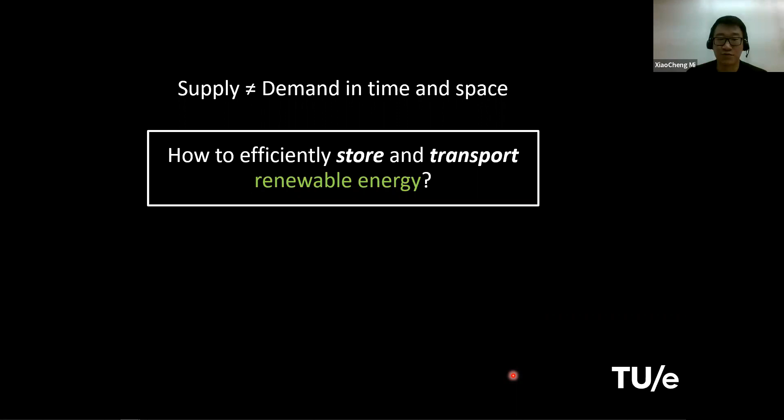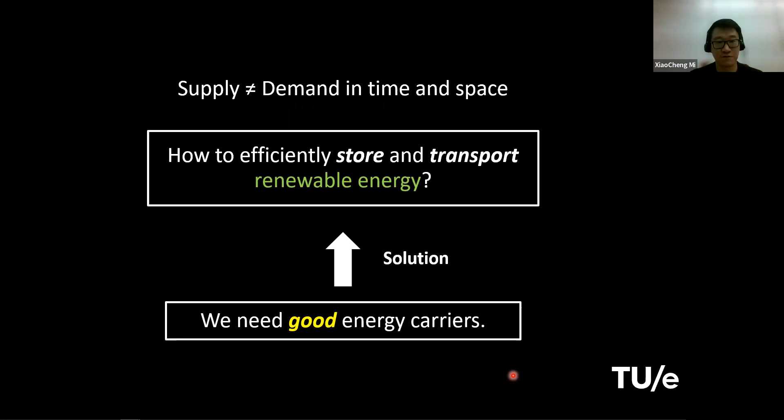So to solve our nowadays energy crisis, the real question is how to efficiently store and transport renewable energy. And what we are looking for now is the solution of good energy carriers or energy storage. In our conventional terminology in combustion, we call these things fuels. So what are the options?

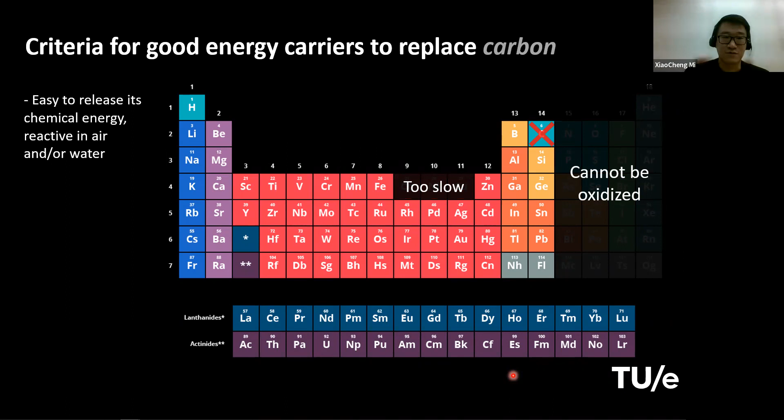Let's look at the periodic table. We know that we do not want carbon. We want to replace carbon, replace fossil fuels to reduce the CO2 emission. So let's cross carbon out in the table. And also we do not want those things that cannot be easily oxidized—either they are oxidizers themselves or they just react too slowly in air or with water.

Also, we do not want these heavy elements, because they are heavy their energy density will be quite low. We do not want rare metals or rare elements because they are very expensive. Also, we do not want anything toxic. Another thing I would like to cross out is these metals which are too reactive, like you can very hardly control their reaction—sodium, potassium, and so on.

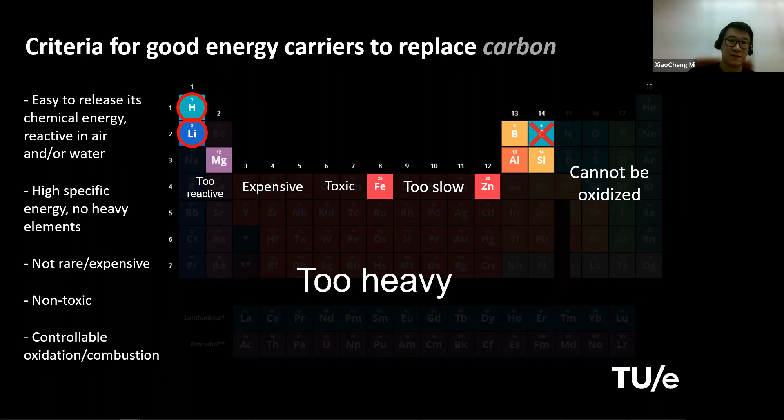Then if we look at this table again, there are not many other options left. Nowadays, there's a lot of attention paid to these two elements, hydrogen and lithium. But there are some drawbacks with using these elements as energy carriers. One thing is the low energy density.

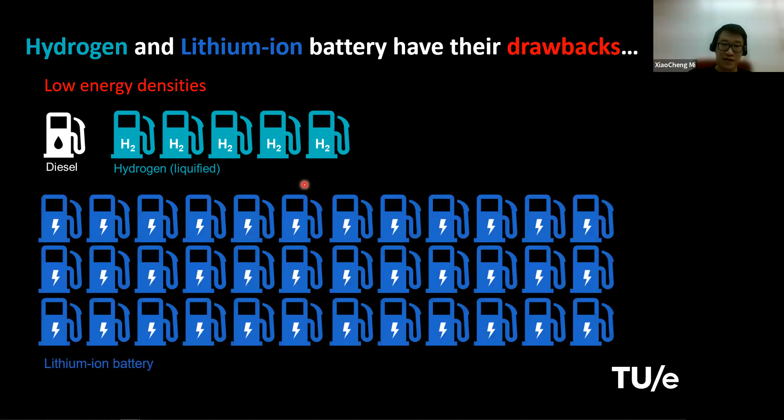So in this small cartoon, it shows that to contain the same amount of chemical energy, you need this one tank of diesel. But if you use compressed or liquefied hydrogen, you need 5 times more volume to contain that. And if you talk about lithium-ion battery, because it has to carry both anode, cathode, and electrolyte materials in there, and only the lithium-ion can transport energy, then the energy density is much lower. So you need that many tanks or volumes of lithium-ion battery to carry the same amount of energy.

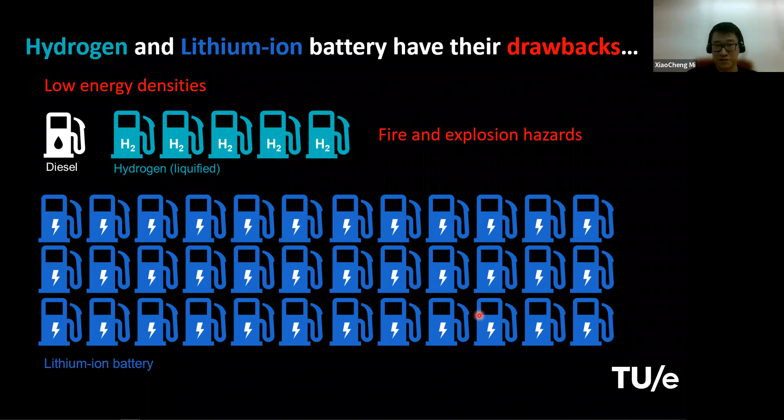And also, hydrogen has always this fire and explosion hazard. And also nowadays, people are talking about this thermal runaway and fire hazard with the lithium-ion battery as well. Another drawback with these batteries is it has a kind of slow discharge rate or loss of energy rate, about 3% per month. This is okay for your passenger car or your electronic devices, it's not that fast. But if you use this type of battery for seasonal storage of energy, this percentage accumulates and the loss becomes significant.

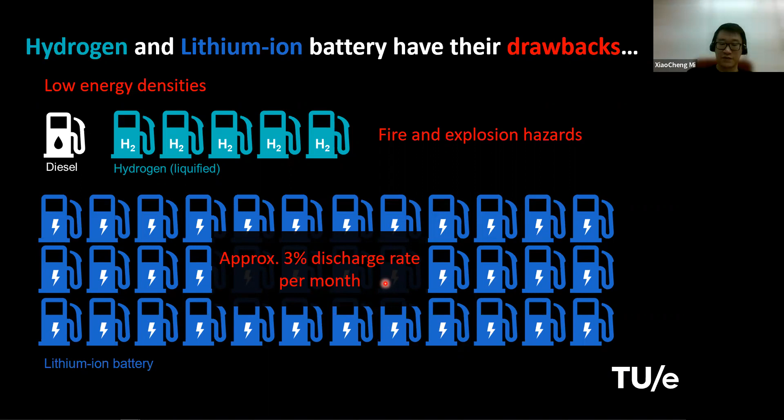So what we are talking about now is this metal-enabled cycle of renewable energy, or MECR. That idea is not mine—it was first proposed, I think, back in 2005 by a professor in the US whose last name is Beach, I forgot his first name, but that was the real first paper to propose this idea. Then in the mid 2010s, Jeff Bergthorson and some other colleagues at McGill reproposed this, and then my colleague Professor Philip de Goey imported this to the Netherlands, and now he's perhaps the most active researcher to upscale this idea to a global or industrial scale.

So the idea is quite simple: you burn some metal powders. Right now, the most promising candidate is iron. You burn iron dust, it releases heat, which can be used for power generation or just used as heat itself.

It has no CO2 or any other polluting emission, and these particles can be recycled after combustion. This recycled iron oxide can be transported to somewhere with easy access to renewable energy, which can be used either to produce hydrogen or directly reduce the iron oxide through electrochemical processes to regenerate iron powder. This powder can then be transported to where you need to consume the energy or generate power. So renewable energy can be transported over long distances and stored over long time.

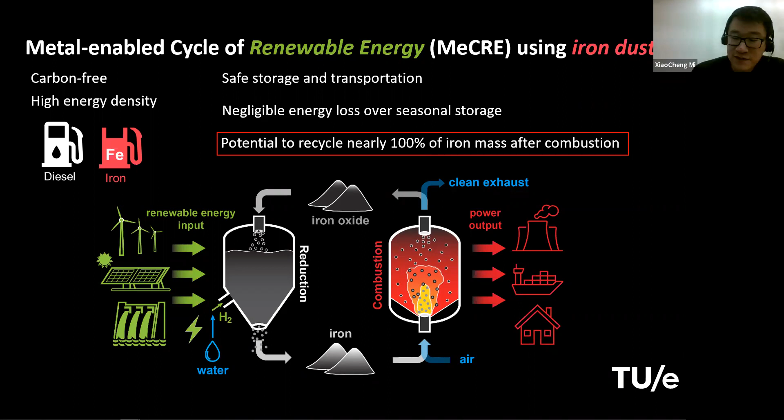I'd like to bring your attention to this feature of iron: it has the potential to be 100% recycled after combustion. This is because it has a very high boiling point, and during combustion the temperature of the droplet or particle won't exceed its boiling point, so it won't evaporate violently. Throughout the entire combustion it stays in condensed phase, first solid then liquid, but it never completely evaporates into gas phase.

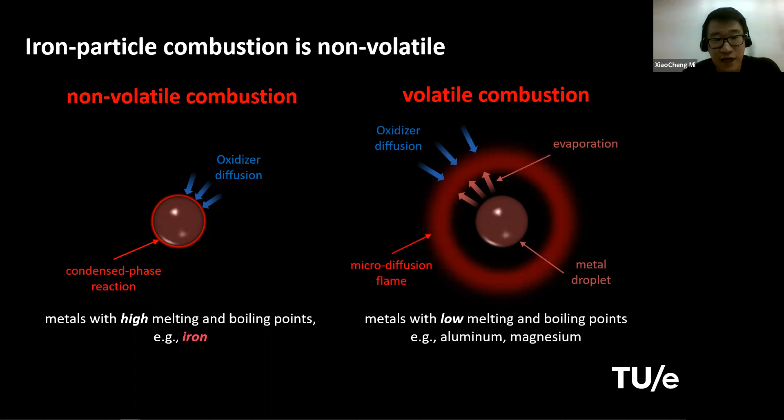This is quite different from other metals like aluminum and magnesium, which have a relatively low boiling point, so their combustion is volatile, where the fuel evaporates first and most of the energy release happens in the gas phase. Because of this unique feature of iron combustion, it gives rise to some very unique characteristics and problems we need to solve with iron dust combustion.

One thing is this heterogeneous oxidation process. Because the particle remains in solid and liquid phase throughout combustion, there's always an interaction between the gas phase oxidizer and the solid phase fuel. Also, because of this non-volatile combustion, the energy release is always first concentrated in the near vicinity of the particle, making the energy release over space highly discrete, as opposed to a more homogeneous or volatile fuel in gas phase where the energy release is more spatially uniform.

Let's look into these unique features, because the real physics or new problems we need to tackle—ones we cannot explain using existing combustion knowledge—are related to these unique features. Let's look at the first one: iron particles are stored in solid phase, so to start combustion the reaction must first happen in solid phase. Understanding the solid phase oxidation mechanism really allows us to understand the ignition process of iron particles.

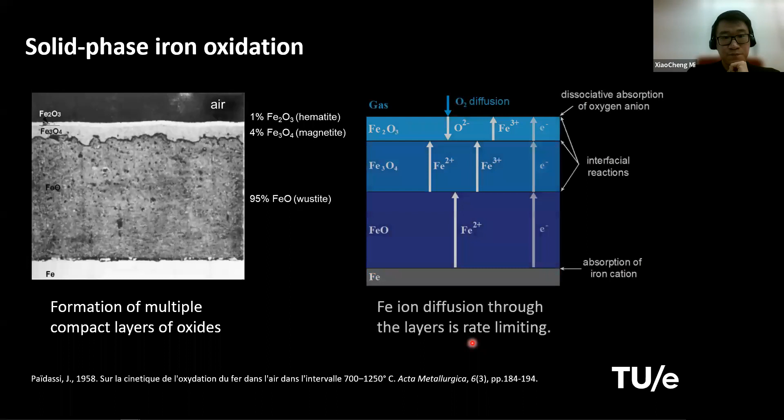People can measure the thickness of these different layers over time, and from there get some kinetics. The mechanism driving this oxidation is the following: in the first layer you have bidirectional diffusion between iron ions and oxygen ions. In the other layers, oxygen ions cannot easily squeeze through because they are big, and through this lattice their mobility is very low. So it mostly depends on the iron ion diffusing outward to meet up with the oxygen stored in the lattice to form these layers.

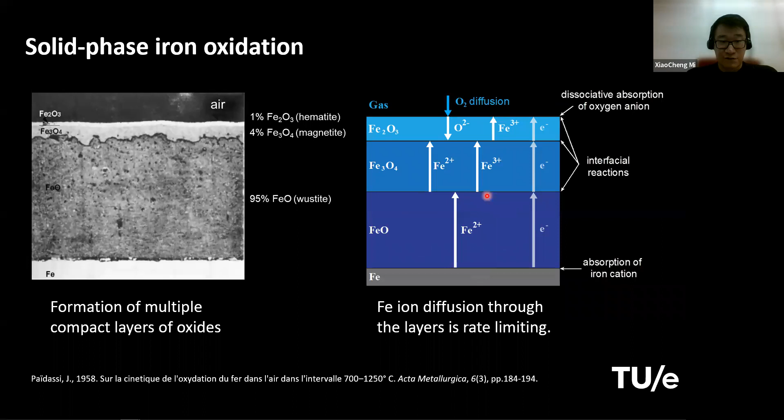So this overall oxidation process is mainly limited by the rate of Fe ion diffusion through these two thicker layers. The FeO layer is definitely thicker, so iron ion diffusion through this layer is the rate-limiting step. We can take this idea and wrap these layers around to build our single particle model for solid phase oxidation, and use this to study the ignition characteristics of iron particles.

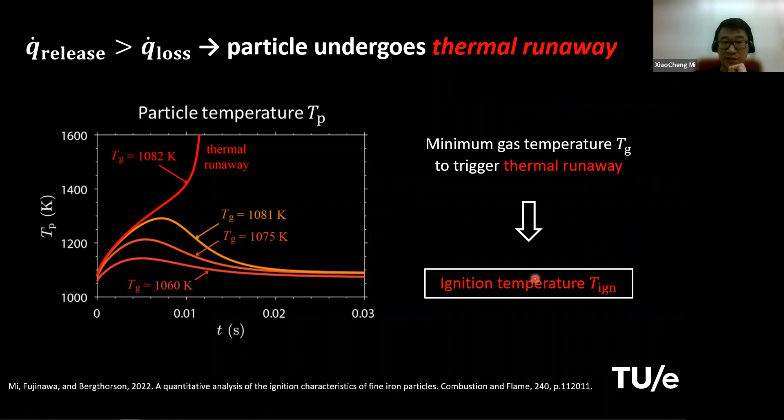Right now, the only experimental value we can compare with is not for iron particles, but for iron foils, or a small piece of iron held by some supporter. They determine ignition temperature using a similar definition as we use here, and the temperatures are not too far apart - I think less than 10% different. But since they're holding these samples with solid frames, they also experience conductive heat loss, which can increase the required ignition temperature.

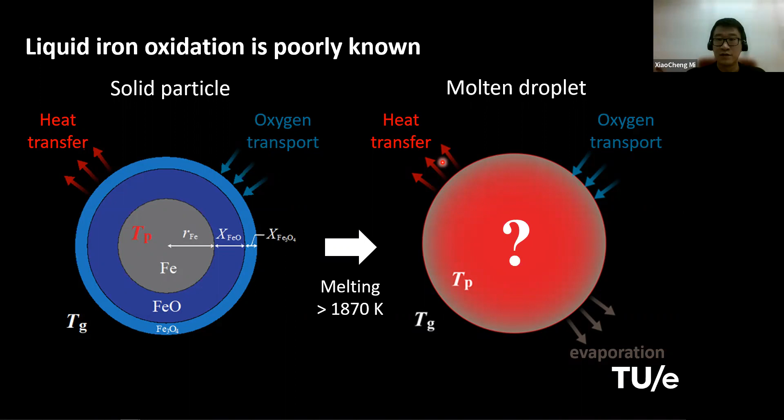But this is all based on the assumptions in this model. I'm not saying this is 100% correct, because there's no experimental measurement of particle ignition temperature yet - experimental verification is required. Once the particle ignites, its temperature can increase to the melting point, and eventually the full combustion process happens in the liquid phase, between the liquid particle and the gas.

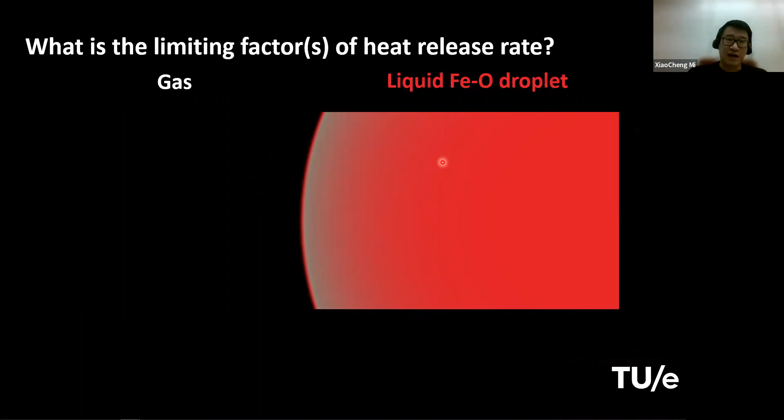What could be the possible limiting factors controlling liquid phase oxidation? One is still the external transport of oxygen molecules from the bulk gas to the particle surface. The other is surface chemisorption - how much of the oxygen molecules that reach the particle surface can be absorbed as ions into the particle. Also, the internal transport of Fe and O ions could be a rate limiting factor.

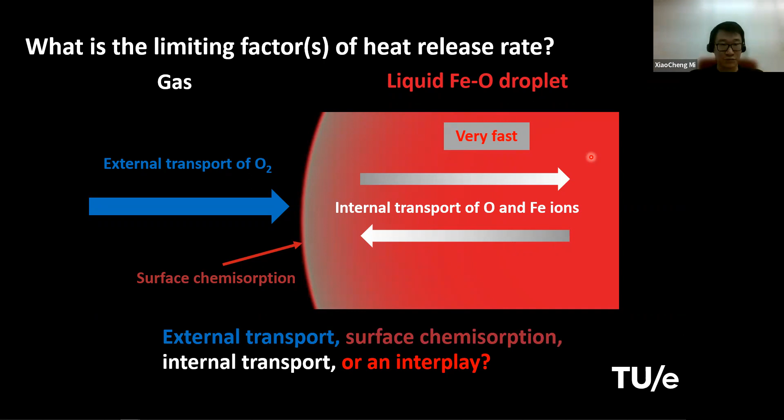Another factor, which is actually not very likely rate controlling, is the reaction rate between Fe and O ions. The reason is that at this very high temperature, once oxygen is dissociated into the particle as ions, it can react with iron atoms very quickly - there's almost no activation energy required for this reaction. So the reaction rate itself might not be the rate limiting factor because it's very rapid. The question is: which of these three - external transport, surface chemisorption, internal transport, or an interplay among them - is the real rate limiting mechanism?

Let's try to answer this through some study. We'll go through some research.

It's more like finding different pieces of the puzzle, and by the end of this part of the talk, I will show you how far we have gone at the moment and what are the remaining unknowns.

To start this journey, first we need some experimental anchor point. We need some time scales, some first-hand experimental input. Otherwise, we're just guessing different things and making different hypotheses without really having any physical touch on reality.

So the two sets of experimental data I'm going to talk about are both from single particle combustion experiments.

The first one is obtained by a former PhD student at TUE, Daoguan Ning, and his colleagues. He used this laser ignited particle reaction system. This is a top view of the burner, and the particle is emitted from this center point. It comes out of the page, and then it will be heated by a laser. The laser can ignite the particle, and then the particle's trajectory and its combustion process will be recorded by cameras, and the temperature can then be measured through this two-color pyrometry system.

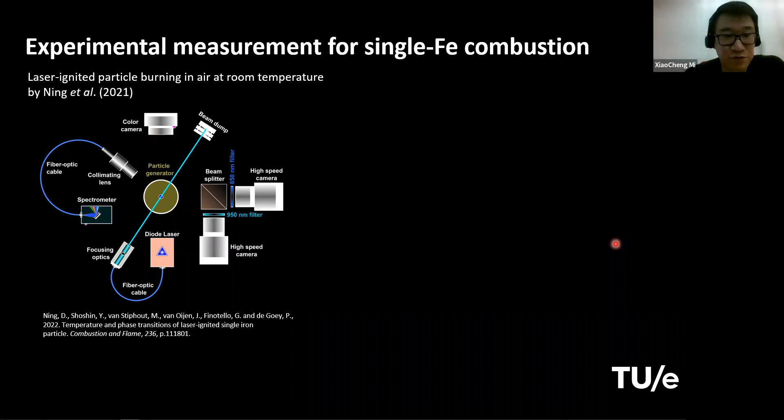The most important result we can use to compare with our model and hypothesis is the temperature history of a single particle burning in different conditions. This is the one that Daoguan Ning and his colleagues obtained. This curve is the temperature, for a particle size around 54 micron, in air. The surrounding gas temperature is just room temperature, so it's considered a cold surrounding. You can see the peak temperature can go up to around 2400, below 2500.

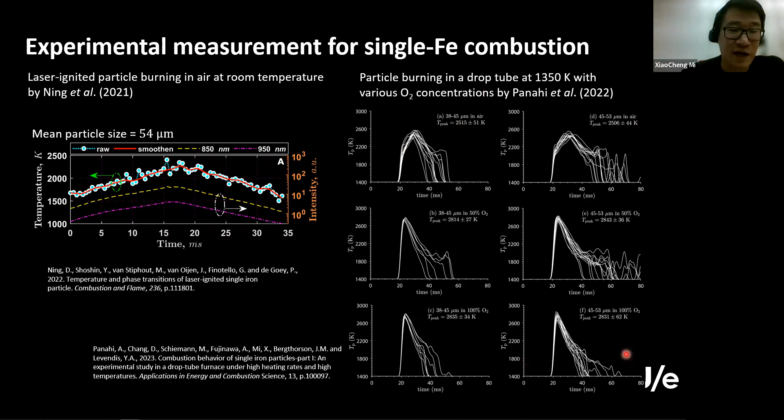These are results obtained from the drop tube experiments. The authors performed two sets of particle sizes, although not very far apart: one from 38 to 45 micron, and another from 45 to 53 micron. They did this in three different oxygen concentrations: the top one in air, the middle one in 50% oxygen, and the bottom ones in 100% oxygen.

We had not only TUE and McGill, but also other universities participating in what I call this early campaign of iron particle modeling. I'm going to review only a few that I'm more familiar with, to let you know what we learned from this early stage of modeling.

In this early stage modeling, we did not include all the possible physics, because we wanted to start with something simple and see if this simple model can capture the most essential physics. So we made the following assumptions: we assume the internal transport is very fast, infinitely fast, so we eliminate that as a rate limiting factor. And we assume that inside this liquid particle, FeO is the only product. Once all the iron is converted to FeO, meaning the molar ratio of oxygen inside the particle is 0.5, we just assume the reaction is over and the particle cools down inertly.

Also, on the particle surface, we assume 100% absorption of oxygen — as long as the oxygen molecule can reach the particle surface, it can be absorbed into the particle. And the heat and mass transfer in the boundary layer around the particle, we assume they are in the continuum regime. In the model, to calculate these transfer rates over the boundary layer, we use the continuum model.

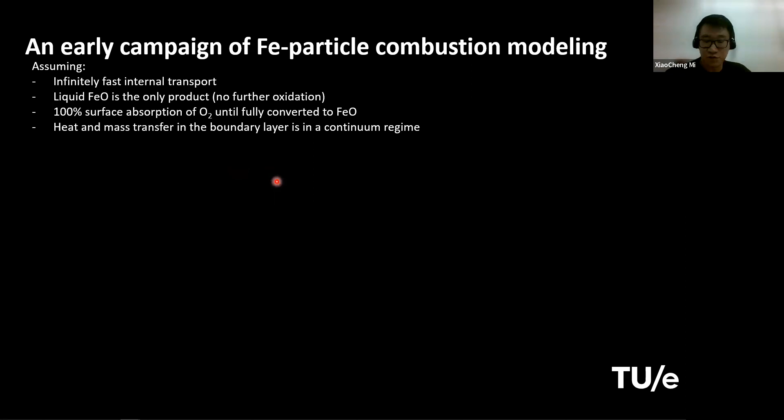So this is what we got — two independently developed models. On the left is work developed by my colleague Leon Thijs and his colleagues. He used a boundary layer resolved model, basically a 2D axisymmetric model where you resolve the gas boundary around the particle — not a single 0D particle model. He showed that his result, this solid line, matches with Daoguan Ning's experimental result, the laser ignited cold environment result, pretty well. Overall the trend is pretty close, and the peak temperatures also agree well with each other.

A student that I supervised back at McGill University, Aki Fujinawa, he also did this job using just a 0D model without all this detailed or more accurate resolution of the boundary layer dynamics. His results maybe it's not as good as Leon Thijs' result, but it's overall okay. The separation between the peak temperature of the experiments and his result is somewhere around 100 degrees. And the overall time scale reaching the peak point is also quite close.

This gives us some hints that FeO might not be the final destination. There must be some further oxidation upon the cooling of the particle, right? It gives you a higher oxidized product. And this hint, or this hypothesis, that we reached after comparing our experimental result, our model result with the experimental result, is actually supported by some other experimental evidence.

So these are some particles burned from one of our burners, and these were given to some collaborators. She was at the Max Planck Institute for Iron Research in Germany, and they managed to cut the particle and look at the cross section of these particles, using backscattered electrons to look at what are the different crystalline structures of different parts of the particle. This allows us to know where the particle is magnetite, like Fe3O4, where is hematite, and where are other things like wustite or iron itself.

So these completely burned particles, they show that there's no iron left at all. That means it's definitely completely oxidized. And you can see that most of the particle is converted to Fe3O4. Maybe in this case, there is a tiny bit of FeO left in the middle. And near the surface, you also have some even further oxidized product, Fe2O3.

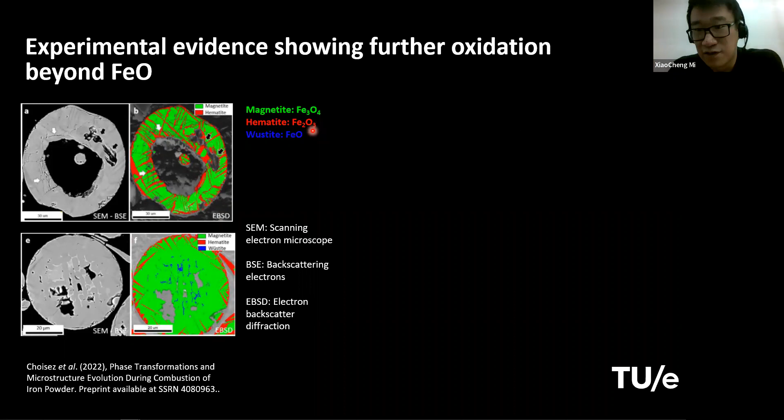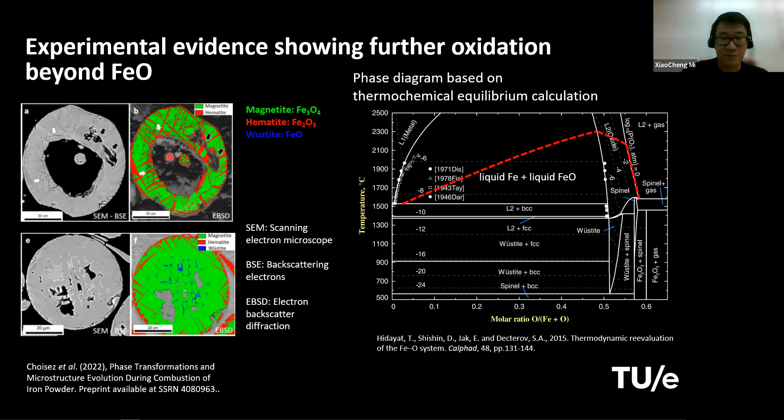And this is what we understood about why we are seeing these big bubbles, or why some of the particles have this opening on its surface. Upon cooling, upon the resolidification process, some excess oxygen is expelled out of the particle.

So there is still some debate. Maybe these experimental data are biased or somehow influenced by the formation of nanoparticles, so you didn't really capture a higher temperature of the particle themselves - they are surrounded by nanoparticles due to the evaporation of iron. But this is still uncertain. We are waiting for some of our colleagues to provide further confirmation on this.

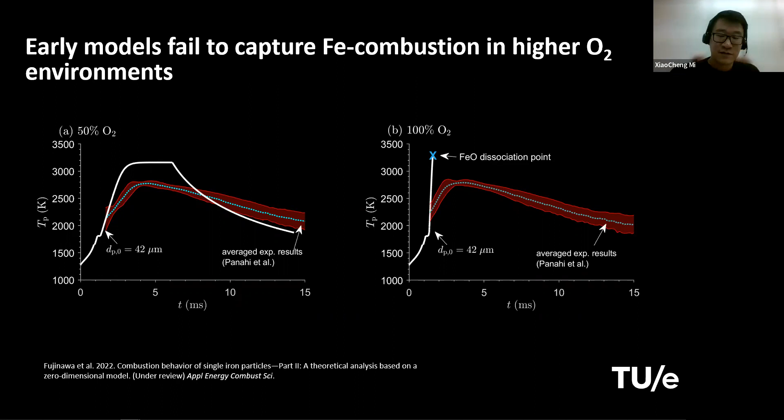But the model doesn't seem correct as you go up to nearly 100% oxygen, because the particle definitely didn't fully evaporate - that means the particle didn't reach its boiling point in any of these experiments. If your model prediction tells the particle would go up to the boiling point, that is not correct. So that makes us think about what are the missing physics and how we can add them into the model.

And we can take a break here.

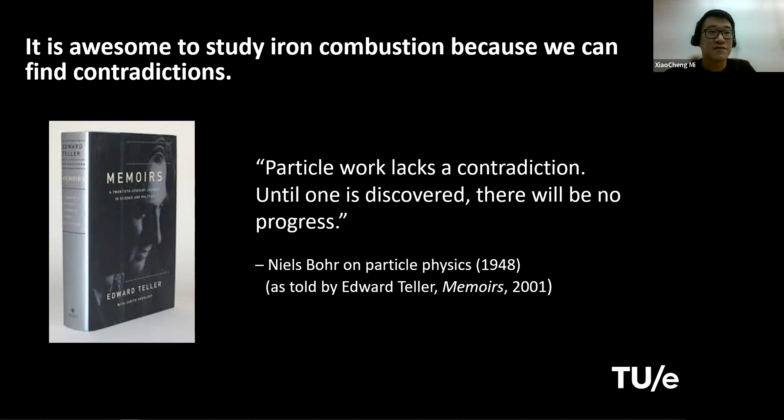That's number one. Number two is the surface chemisorption. Before, we assumed that all the gas molecules can be absorbed into the particle upon their collision with the particle surface, but there could be some accommodation limits - maybe some of the oxygen molecules can just bounce back without being dissolved into the particle.

And the reaction, although very fast, we previously only assumed the product is FeO, and after FeO is formed we stop the reaction - this is not supported by the material characterization evidence. So we want to have some further oxidation beyond FeO.

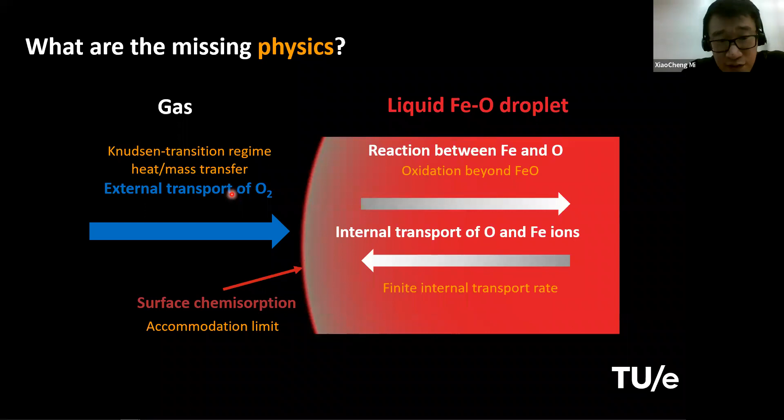We also assumed that internal transport is very fast, but maybe this is also not true. So at some point we have to consider a finite internal transport rate. But let's not put everything together, because to really include this finite transport rate inside the particle, you need a particle-resolved model - you cannot do this analysis with a 0D point particle model.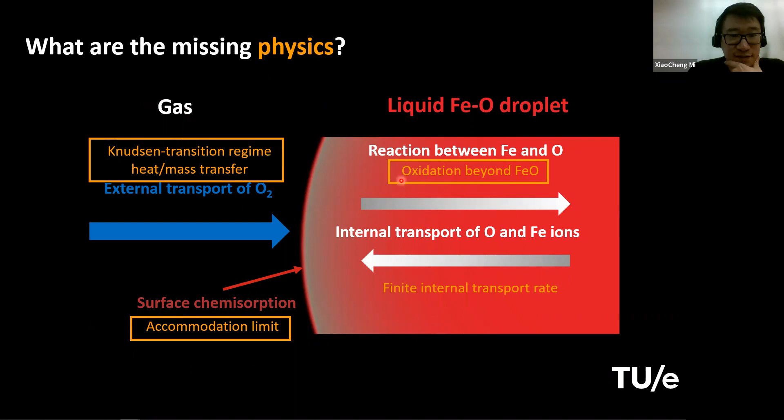So let's build a model only taking these three ingredients, while keeping the assumption of very fast internal transport. Let's see how much improvement we made to the model.

To consider the transition regime of heat and mass transfer, we take this paradigm used in the literature, which is the two-layer model. In the inner layer, or this so-called Knudsen layer, the heat and mass transfer is governed by the free molecular regime mechanism, and outside this layer, we still apply the continuum heat and mass transfer model.

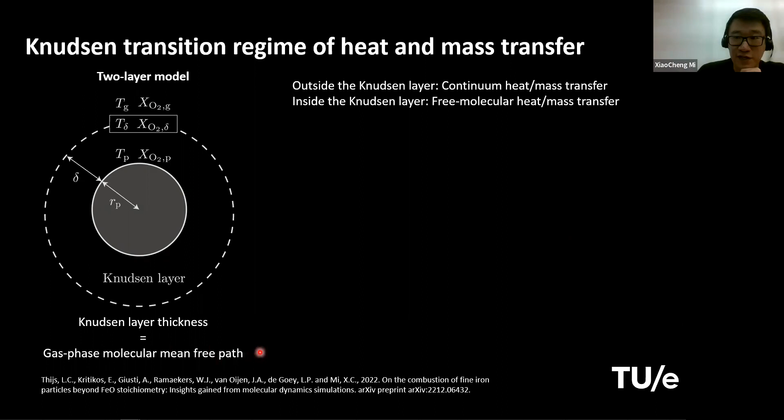The thickness of this layer is equal to the gas phase molecular mean free path, which can be calculated as a function of the boundary layer temperature. And inside this layer, the mass and heat transfer rates are calculated using the free molecular regime's heat and mass transfer model.

This looks different from the continuum heat mass transfer model. You can note there are two important parameters here: the mass accommodation coefficient and the thermal accommodation coefficient. The mass accommodation coefficient measures how many of the molecules can be absorbed into the particle, divided by the total number of molecules colliding with the particle.

The thermal accommodation coefficient measures the maximum energy that can be exchanged by a molecule reflected from the particle surface, to the actual energy exchanged between the molecule and the particle surface. This bracket here means it is an ensemble average that you need to measure over a big number of particles or molecules to get this result.

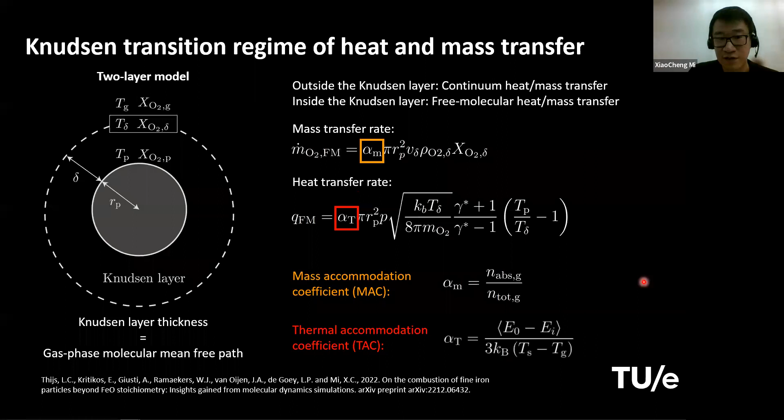But these values for liquid iron and iron oxide surface with oxygen and nitrogen molecules are not available in the literature. So we decided to use molecular dynamics simulations to do this. This work is mainly done by our PhD student, Leon Thijs, collaborating with PhD student Stratos at Imperial College London. They performed MD simulations to measure thermal and mass accommodation coefficients for iron surface and also iron-oxygen mixture surfaces. The methodology used here is called molecular beam simulations.

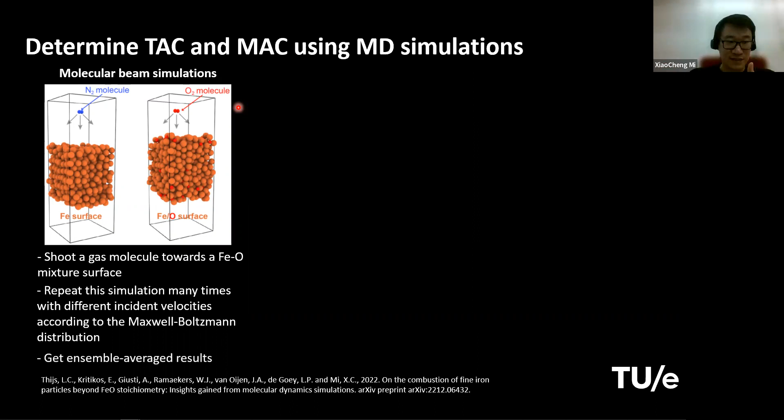The idea is you shoot one single molecule towards this surface, and then you can measure whether it is absorbed into the surface and what is the energy exchanged before and after the collision. After you repeat this simulation many times with different incident velocities of the molecules according to a certain Maxwell-Boltzmann distribution, you can obtain this ensemble statistical average result for MAC and TAC.

So here are some results. On top here is the result of TAC for both iron surface against nitrogen molecules, and also Fe and O mixture surface with oxygen molecules. You can see this here is TAC for nitrogen as a function of temperature. It doesn't seem to vary that much, between the value of 0.1 and 0.2 over the liquid phase temperature range. And here is the TAC for this system as a function of the oxidation degree, or the oxygen molar fraction in the mixture.

You can see it is almost constant for a while, nearly unity, nearly 100% absorption, until you reach ZO equals 0.5, which is the stoichiometry of FeO.

And if you look at the result of mass accommodation coefficient as a function of the oxidation degree, this trend is more interesting, I guess. You can see that the mass accommodation coefficient decreases. That means that the more oxygen dissolved into your liquid particle, the less likely you can absorb more oxygen on the surface, which makes sense.

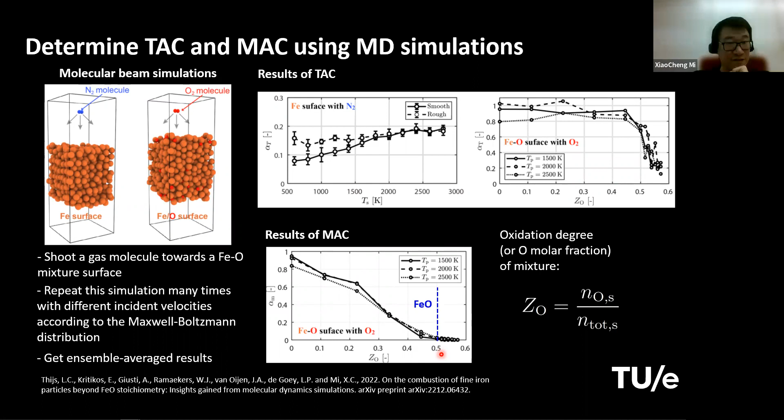Also you can see that once the ZO is beyond 0.5, this value drops down to a very small value. It's not exactly zero, there are some finite rates - you can still intake some oxygen into the particle, but the value is much smaller than for lower ZO values. FeO stoichiometry is actually here, at 0.5. That means after you oxidize up to FeO stoichiometry, the further intake of oxygen into the particle will become harder and very likely become a rate limiting factor.

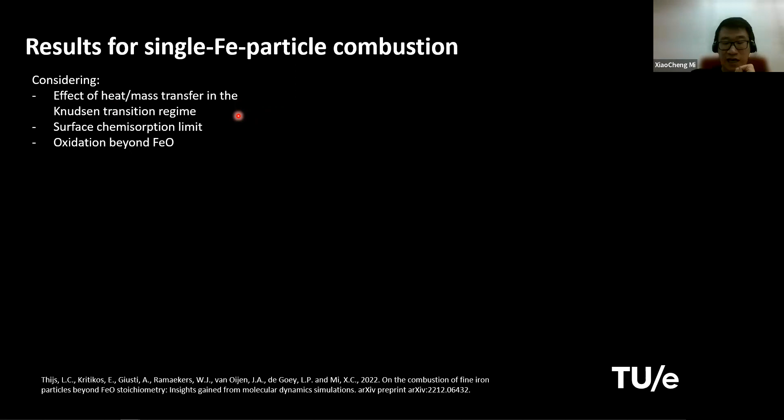So we take this MD simulation informed accommodation coefficients, and we can perform some 0D single particle combustion modeling to get some results. Here you can see we considered the effect of the Knudsen transition regime of heat and mass transfer, because we are using this two-layer model, and some surface chemisorption limit by considering the mass accommodation coefficient below unity, and also the oxidation can happen beyond the stoichiometry of FeO.

But we are still assuming infinitely fast internal transport of FeO and of Fe and O atoms. And this is some results. The solid line is again the modeling results, and this small dotted line is the experimental result with the error bar, which is the shaded region.

You can see again for this relatively low oxygen concentration, it matches very well, and we do not see that sharp pointy peak temperature anymore. You have a more smooth transition from temperature increase to temperature decrease, and the temperature decreasing part, or the cooling part, seems to match the experimental result better. This is because in this case we do not have inert cooling anymore - we have further oxidation towards a higher oxidized product, and also the heating seems to match the experimental result better.

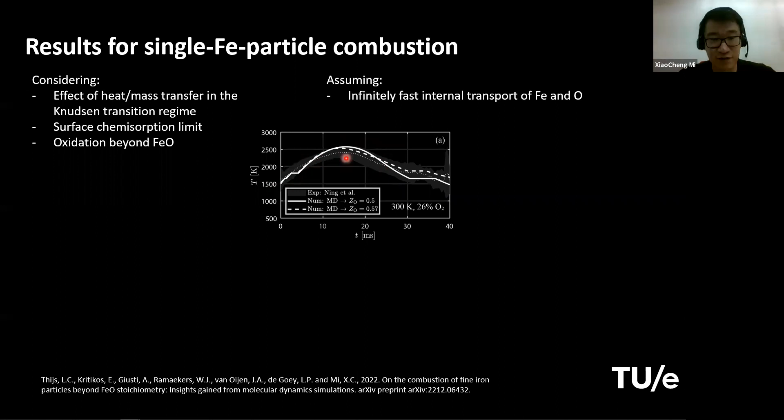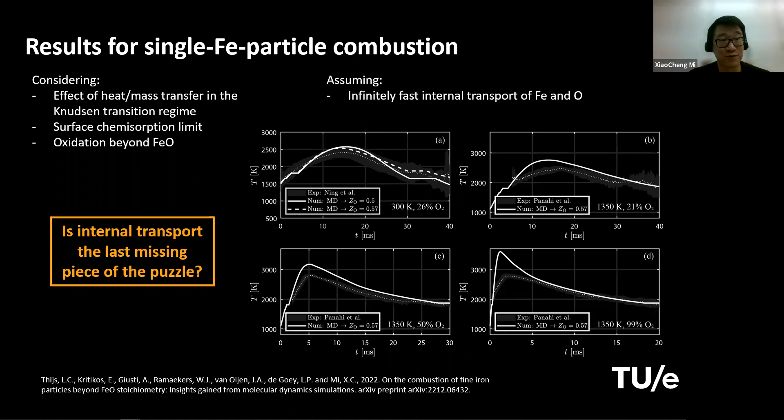So this leads us to our final, or I hope final, but maybe there are other unknowns. We were wondering, is this internal transport really the last missing piece of the puzzle? There are some preliminary results to look into this direction. But as I said, if we want to resolve what happens internally inside the particle, you need a particle-resolved model, and also you need diffusion coefficients.

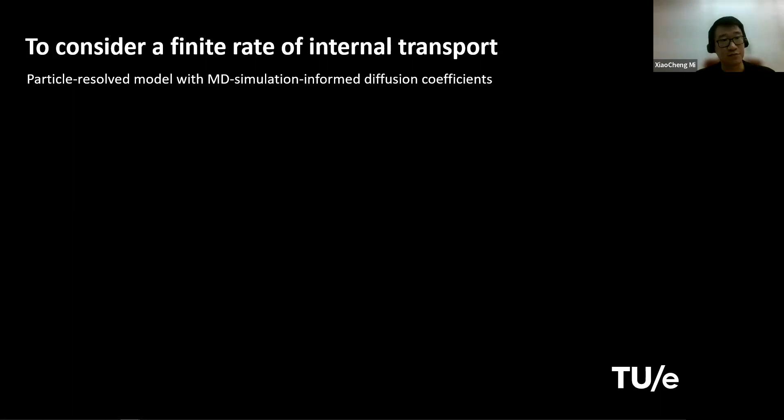Our student managed to get the diffusion coefficients of Fe and O within this high temperature liquid mixture using MD simulations, and this allows him to proceed with a particle-resolved model. This is just some very preliminary result that he obtained.

You can see that inside the particle, you can even have a non-uniform distribution of velocity, because the particle, for example in this drop tube, there is a slip velocity between the particle and the gas. So the gas can give this momentum to the liquid inside the particle, and this liquid can swirl and create this non-uniform velocity field within the particle.

This is only about 7 milliseconds after you supply oxygen to the particle, and you can see a clear spatial gradient inside the particle. That means the transport of oxygen inside the particle is not as fast as we assumed before. This internal transport might happen over a time scale comparable to the entire combustion process, to the other transport processes. So I think this is very likely the right direction that we need to look into.

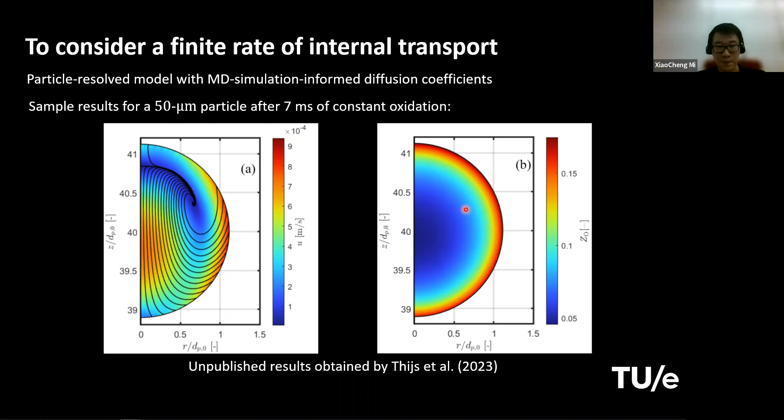But you may get frustrated that we just keep adding more and more complex physics. This is a quote that my PhD supervisor always made: any darn fool can make something complex. It takes a genius to make something simple.

Because if we keep adding dimensions, keep adding physics into the single particle model, nobody can use that for any CFD computations. But also, nowadays, I think this has become a cliche quotation that all scientists quote: everything must be made as simple as possible, but not one bit simpler.

Okay, I will go relatively fast with the other feature because it is even more complex and we have even less certain answer to it, but I think it's still very interesting. As I said, since iron particle combustion is very non-volatile, the energy release is within the very close vicinity of the particle, and this will make the overall energy release over space highly non-uniform or highly discrete.

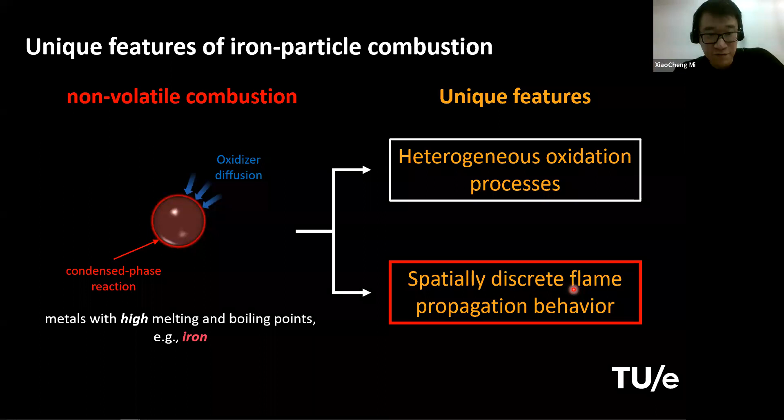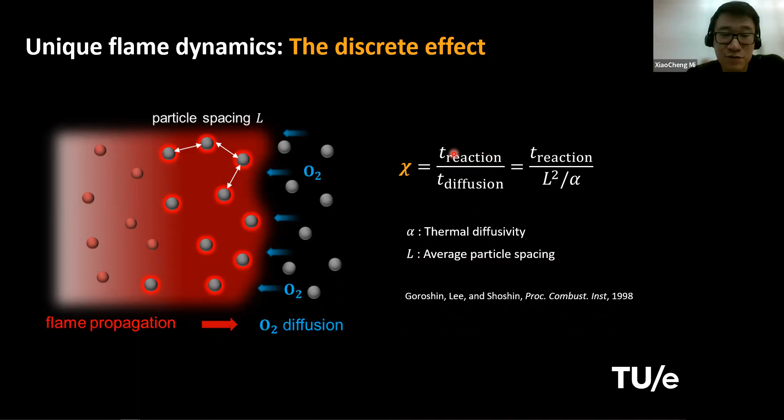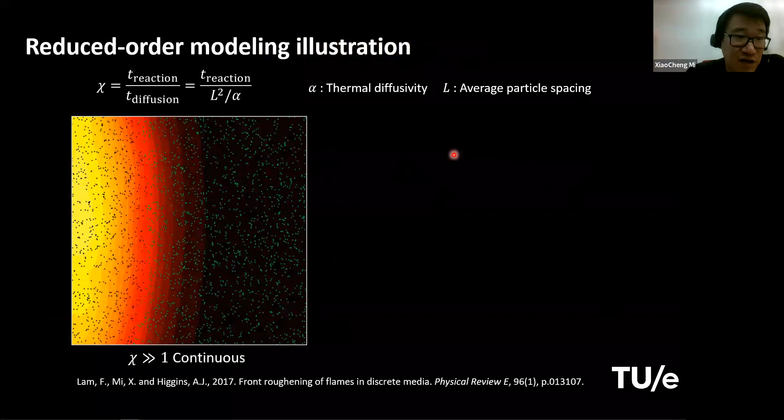To understand this phenomena, we can look at the ratio between two key timescales. One is the reaction time, T reaction, the time over which an iron particle releases its energy, and the other is the characteristic time scale for heat to diffuse from one particle to its neighbor. If this parameter is much larger than 1, the reaction time is much longer than the interparticle diffusion time. Then after a particle releases energy, it has enough time for the heat to smear out and become smooth over space.

So the resulting flame structure, using a toy model—not really an iron flame model, but a very simplified theoretical model that we developed, or rather used, to study this problem a few years ago—at this very large chi parameter regime, you see a flame that is continuous and very similar to what we have seen as a laminar flame in gaseous flames.

But if this chi parameter is much smaller than 1, the reaction time is much smaller than the interparticle diffusion time, and after each particle releases heat, it takes time for the heat from one particle to reach its neighbor. Then the resulting flame is totally different: it gives you a highly non-planar flame front with all these finer details between the particles. So these are only theoretical pictures. What really happens in real world iron dust flames? Is it something in between, or something even more complex?

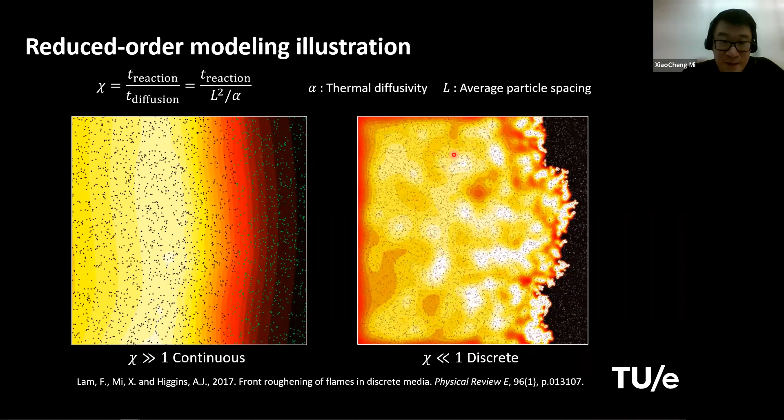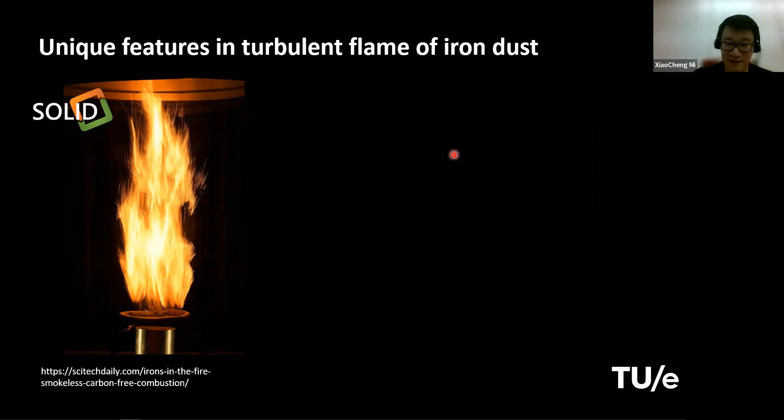Unfortunately, the picture would be even more complex because for any realistic burners, you must burn your iron dust in a turbulent flow, and the turbulence itself can inhomogenize your space, temperature and the flow field. These highly discrete energy release particles are carried by this turbulent flow, and the picture is even more complicated. So to understand this complexity, we can do this thought experiment.

This will give you the integral length scale and the Kolmogorov length scale, which were both measured by PIV in this published work. The integral length of this turbulence is somewhere between 0.5 to 1 centimeter, and the Kolmogorov length scale is around 100 microns, or 0.1 millimeter.

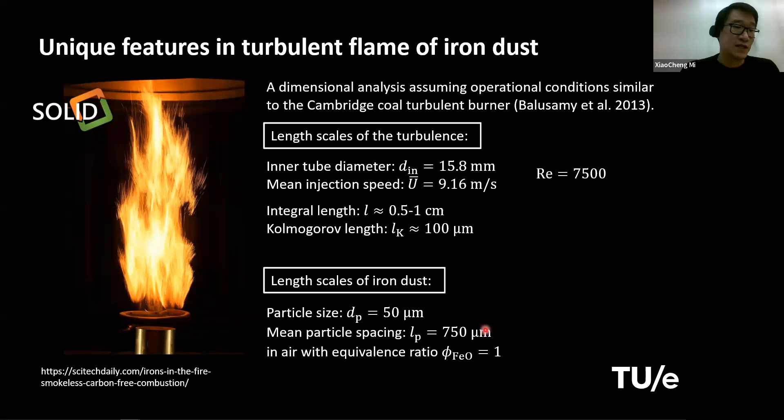If you compare these different length scales of particles and the turbulence, we get a few remarks from this dimensional analysis. The first one is the particle size is actually smaller than the Kolmogorov length scale of the turbulence.

So viscous drag on these particles tends to dissipate the turbulent kinetic energy. That's number one. Number two is this particle spacing is actually between your Kolmogorov length scale and the integral length scale of the turbulence. So this is interesting: that means your particle itself tends to dissipate the TKE, but the discrete energy released from these particles tends to enhance or produce more turbulent kinetic energy, because the spacing between the particles is in this intermediate, energy-producing length scale range.

And the last remark, I think even more interesting and more unique to iron combustion, is that the particle Stokes number can range, depending on whether you're talking about the Kolmogorov length scale or integral length scale, from 0.01 up to 10.

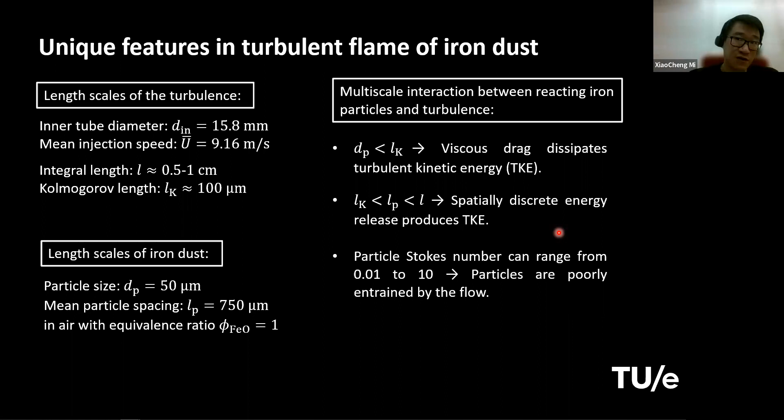So Stokes number is the measure of how well the particle can be entrained by the flow. The smaller the Stokes number, the smaller the inertia the particle has, so the particle can be more easily entrained by the flow. The larger the Stokes number, the larger the inertia of the particle compared to the flow, and in that case the particle behaves more like a cannonball - it doesn't really follow the gas.

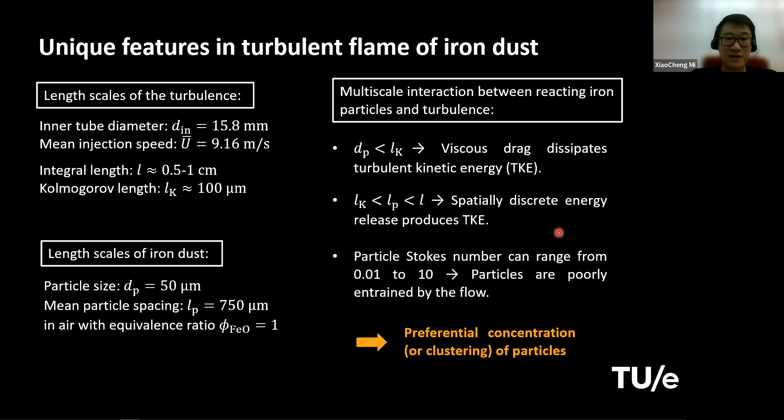So why this is important and uniquely important for iron, I think there are two reasons. One is that iron has very high density compared to other solid fuels like coal, or even aluminum, or sprays of liquid fuels. That's number one - this will give iron high inertia.

The second unique feature is that iron combustion is non-volatile. For volatile fuels, although they can have some interesting intermediate Stokes number at the beginning, they will evaporate and become a gas phase, and combustion happens in gas phase. But iron combustion is non-volatile. They remain in condensed phase throughout the entire combustion, so they stay at this high Stokes number throughout the entire energy production process. So we really need to care about this phenomenon.

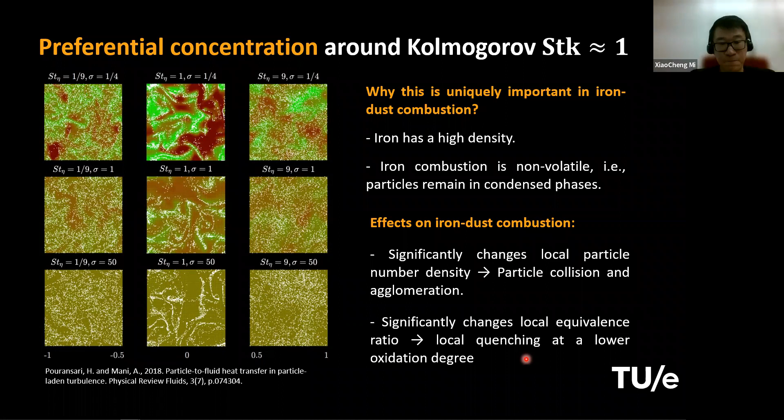I'll go fast, I know I'm running over time. So we are now starting to do some gas phase or carrier phase DNS to resolve particle interaction with turbulent flow. In this case it's actually not turbulent yet, because resolving a higher Reynolds number requires higher computational cost. But even for this very low Reynolds number flow, you can see the particle energy release can trigger some turbulence or turbulent-like flows.

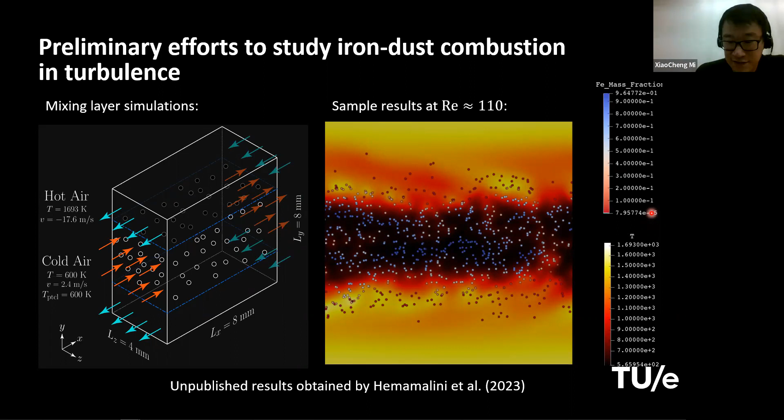That actually supports our hypothesis from before, that particle spacing can create regions where the interparticle gradient produces kinetic energy of turbulence. Further studies and more extensive results from this simulation will be presented later this year at different conferences.

Since I've talked about a lot of things that are uncertain, I don't think we should make any certain or concrete conclusion. So rather than having a conclusion slide, I just list some outstanding problems that I would like to invite all the listeners to this talk, or future viewers on YouTube, to join our collaboration and effort to tackle.

First, for the solid phase iron particle ignition, we do have some theoretical model, but that model is based on metallurgy kinetics. We do not have any direct measurement of the critical temperature required for solid iron particles to ignite, and this experimental proof or verification is required.

The second problem is about the heat release rate. I've talked about all these fundamentals, but eventually for engineering and technology development, people just want to know: if you burn this much iron particles, how many watts or kilowatts of energy are produced? To really know this, we cannot ignore all the fundamental unknowns in the heterogeneous oxidation mechanism, in this highly non-uniform combustion, further complicated by turbulent preferential concentration of particles.

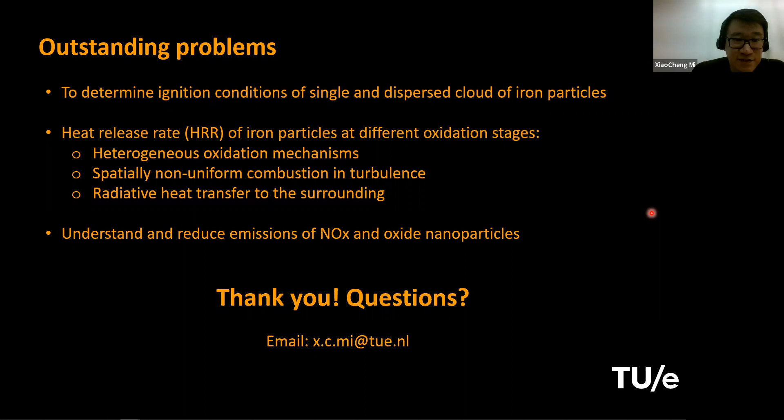I would like to thank you all for your attention. I know this was a very long and maybe a little confusing talk, because there are too many uncertainties, and I would like you to ask questions—some I can answer now, and hopefully some will be answered in the future. Thank you.